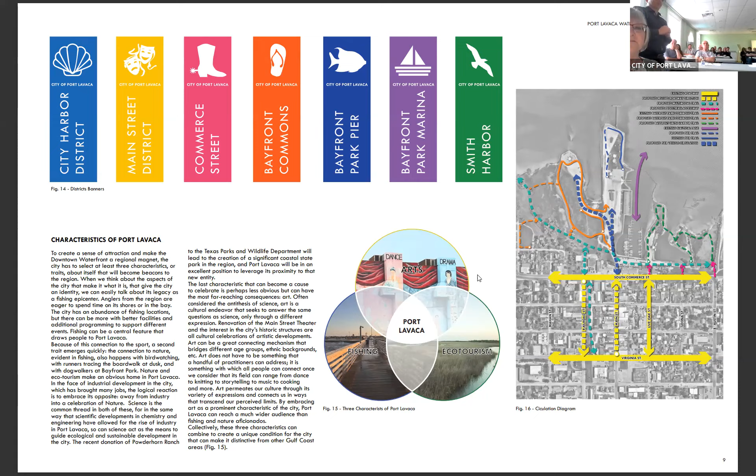Fay Bauer Sterling Park could use some help with landscape adjustments to improve its appearance. And because it's immediately adjacent to the railroad depot, our sense was that you could take a linear park all the way to Commerce Street from Virginia.

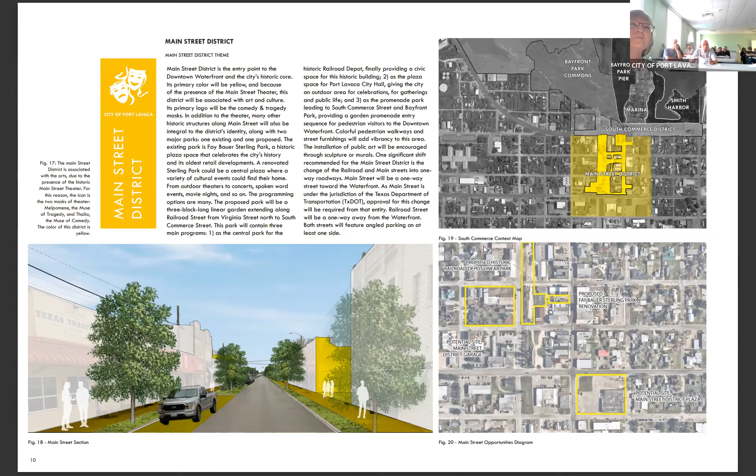It's about containing vehicles but giving them sufficient space to do things. That's much further down the line, but something we have to consider when we think about all of Main Street in its entirety. We have some imagery that gives a sense of what that would look like: a single lane traveling one direction with on-street parking to the side, vegetated planting with trees, giving more people spaces. So we're taking road away in favor of adding more people spaces.

This gives you a sense of what the overall image could look like. Again we have the pop-up or temporary market space. We have Main Street going one way to the northeast toward Bayfront Park, and we have the Railroad Depot Park, a linear park that celebrates the fact that the railroad was instrumental in the making of Port Lavaca. Then we have some ancillary spaces—potential art opportunities, potential little plazas, ways of engaging the built fabric in a meaningful way.

I want to say one thing about the colors, because I know you're looking at it and thinking, that's a lot of yellow—and it is. But it's not that we want to drop a giant bucket of yellow paint all over the place, rather that yellow is the identity or theming color of the district. We'd want that to show up not everywhere, but in key moments or locations where people see it—on lampposts, benches, or waste receptacles. There are ways of branding and theming that aren't ostentatious or obnoxious, but definitely give you a sense that yellow is the color for this particular district.

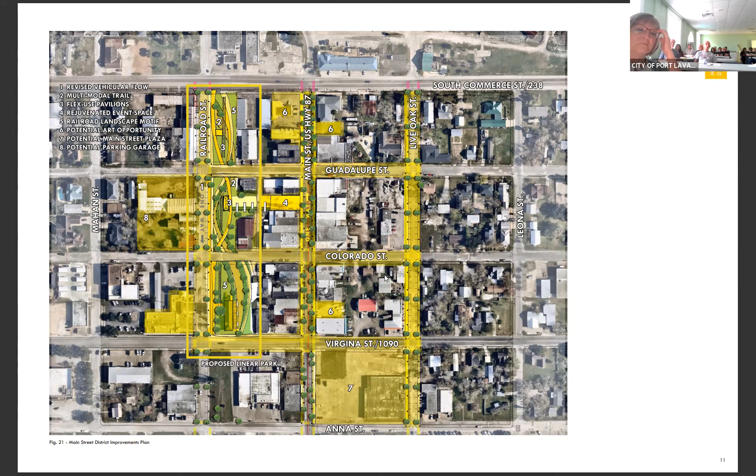Orange is for Bayfront Park, purple is for the marina, that kind of thing. You begin to associate a specific district with a specific color through little moments of color. For the purposes of the plans, they're much more exciting when there's a whole bunch of color on.

Along with every large scale plan we show, we're also going to show a series of next steps, dividing that into what kinds of things you can do in the short term, midterm, and long term. This is only in terms of design time, because the actual work itself is even longer. But you need a sense of what you can do very quickly, what takes more investment, and what takes a really serious amount of time—that helps you prioritize and think through what's reasonable.

In every one of these, for the short term we were looking for the easy things you can just drop in—maybe fabrication could take three months at most, depending on how supply is these days, though I think it's improving overall in the construction industry. Costs are beginning to come down too, which is also a positive sign.

But things like graphic identities or wayfinding—wayfinding being signage or banners—and then theming pedestrian crossings. What does that mean? One thing we felt could be really useful and inexpensive is having crosswalks painted in the particular district you're in. These are really easy to do; they're thermoplastic paints normally used on curbsides and parking lots. There are many examples of this being used decoratively, and it doesn't take a lot to replace—the maintenance is relatively inexpensive.

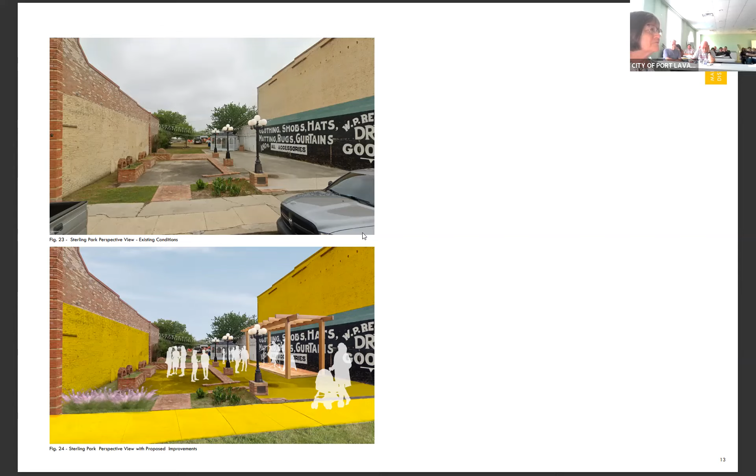Okay, so we're moving closer to Bayfront Park, and we come up to the Commerce District. Why is it a boot? And I did forget to mention—

For Main Street, the identity of Main Street is the artistic core of the project. The identity for Commerce Street would be more about look, because it's called Commerce Street, and because there's potential for restaurants and things like that, and because it's a transition between downtown and Bayfront Park, the idea was this could be a retail corridor. The identity for Commerce Street is that it's very much a place, or at least historically a place, of retail and commerce.

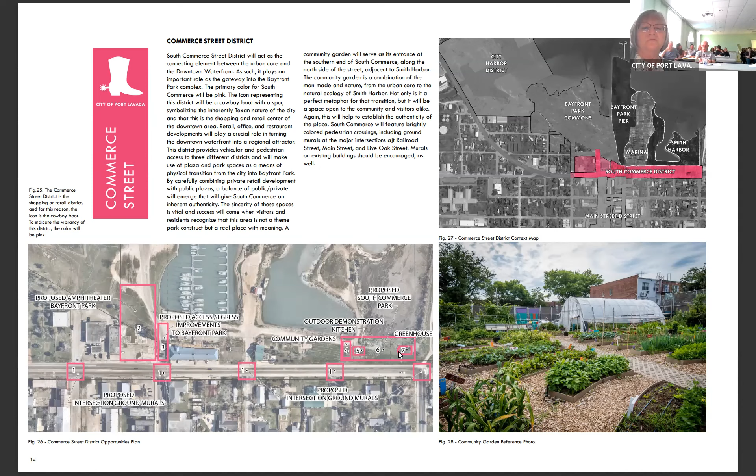You give people the opportunity to look at having a space of their own to grow the kinds of things that they want. It sometimes depends on the level of investment, not in terms of money, but in terms of time, how successful those types of places can be. But there are a lot of examples where it's very effective. Let's go to the next one.

Another element we started thinking about is how do you put Commerce Street on a road diet? How do you make sure you have sufficient parking space, something that improves the aesthetic appearance of Commerce Street itself? One easy way is with planted medians with palm trees in the center. Palms can take the salinity of the air in this region, so it just makes sense to do it that way.

We're also talking about a bicycle lane that may have some protection from the sun, so partial shade. That came as a result of one of the back-and-forth sessions, where people seemed to really want something to that effect. That's a longer-term problem.

Another thing we can look at here is the city plaza on the corner of Main and Commerce. Beyond that is an amphitheater that is really more part of Bayfront Park Commons. The intent is to keep a lot of the elements we have here and simply enhance them as possible.

For commercial development, we're saying this is a potential site. It doesn't mean the city is going to get involved in developing those restaurant or retail areas, but rather the opportunity for that is there.

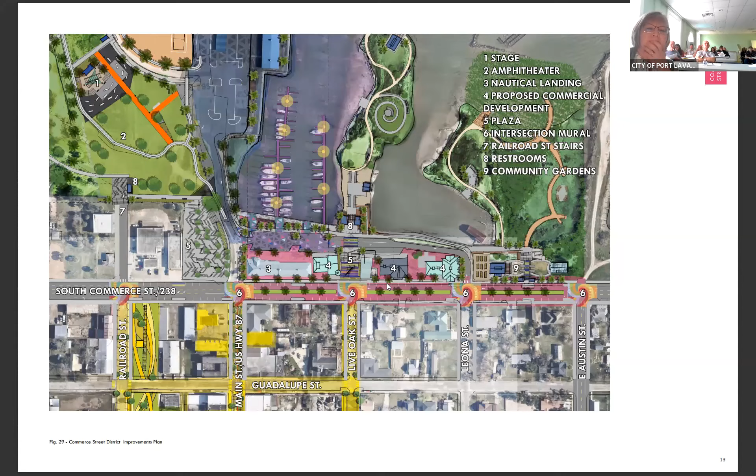The stage, the amphitheater, we'll talk about a little bit later. All right, go to the next one, because then we'll talk about what's short term.

So for the short term, again it's a similar process: it's about the banners, the wayfinding, the ground murals, the stuff that's really cheap and quick to deploy. Those are the things that begin to give a sense of identity. Once you have a sense of identity, you know, oh, this is this district, that's that district. Then you can begin to look at the longer-term projects and make further investment. Because it's all really great to talk about these giant plans we have in mind, but if nothing happens, it's just frustrating for everybody involved. That's why it's important to have some short-term goals and some really quick visual examples.

Banners sound really silly, but they're really amazing at giving a sense of place, because all of us, we're in the yellow banner area and now we're in the pink banner area. It's also a way of advertising potential events, and they're very cost effective. For me, it was really easy to say, look, you can begin to give a sense of identity through things like ground murals and banners. If you just do those two things, it'll change the way people perceive the area quickly.

Bicycle and roadway improvements, things like medians on Commerce Street, will require a conversation with TxDOT. Who knows, it could work or it might not, but the idea is to enhance the appearance of Commerce Street, to make it feel special and different from the rest of 238.

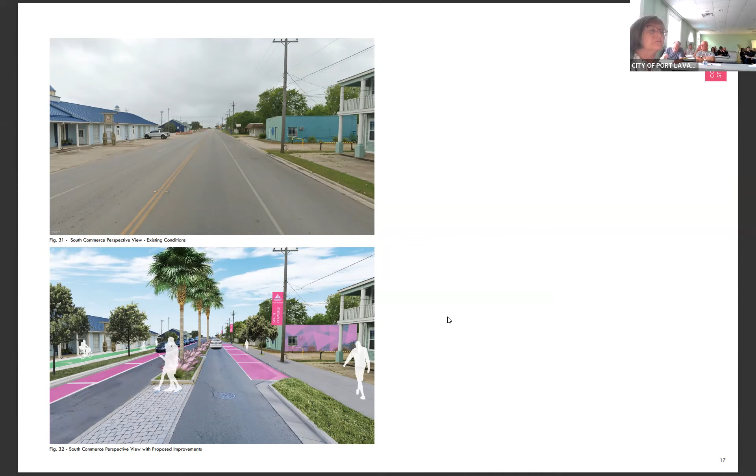I know I do. But when you begin to narrow it down a little bit, people take their time. Since we're talking about a lot of pedestrian activity on the site, it's important to slow that traffic down and make it safe.

How likely is it that TxDOT would approve something like that? I've begun the conversation, and they're waiting for this to be adopted to really start looking at it closely. It wasn't like a hard no.

They said, especially on Main Street with the one way, they would be looking to us to provide a study to show an alternate route, but we'd start with just some concepts we're coming up with. We'll take it step by step, but if at some point we pursue this, we would need to do a traffic study and show an alternate route instead of having Main Street both ways.

We haven't really talked about this on Commerce, but again, we're not changing traffic patterns there, so I don't anticipate that being an issue. Of course, we would be paying for it, but TxDOT in recent years has become very, very pedestrian friendly. They are cognizant of things like this and generally supportive of projects just like what we're looking at on Commerce Street.

What about trucks? Didn't we stop 18-wheelers from using Main Street a lot? Is there going to be a problem with that? You've got to do this downtown.

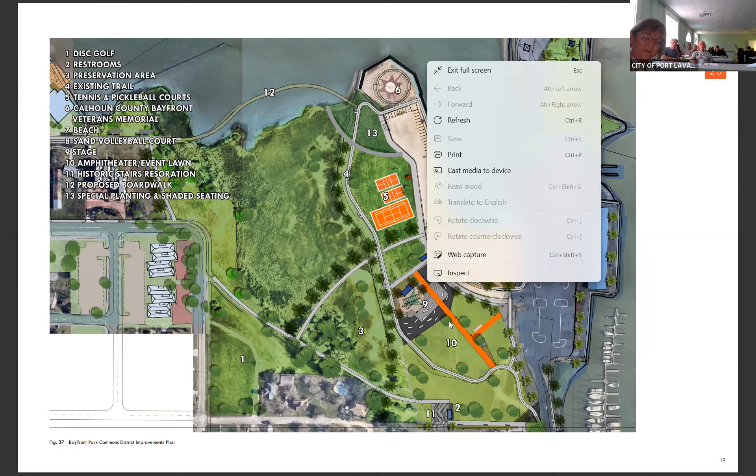Right now it's pointing south, southwest—kind of at an angle, sort of toward downtown but a little bit away. It doesn't face west, it's facing southwest. I had always thought it was going to face out towards the bay. We looked at that for events, and sun considerations for the audience—there's a lot of things like that to think about, plus the topography. Those are the kinds of things we decide in detail design, much further down the line, with specialists in that sort of design brought on board.

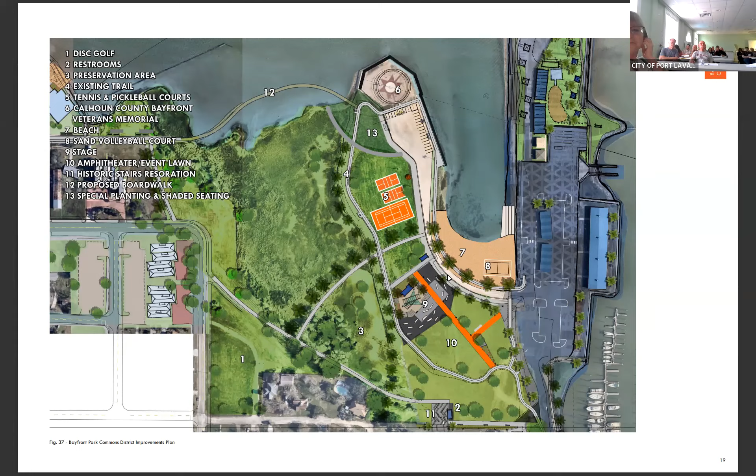Same thing with short-term, midterm, and long-term projects—your graphic identity, your banners, those are cheap and easy to do up front. The preservation area is fairly easy too; you just rope it off and make sure nobody goes into it. The disc golf course is a midterm project, and expanding the multimodal trails is midterm as well. Your longer-term projects are the beach itself and the amphitheater—those are the big long-term projects.

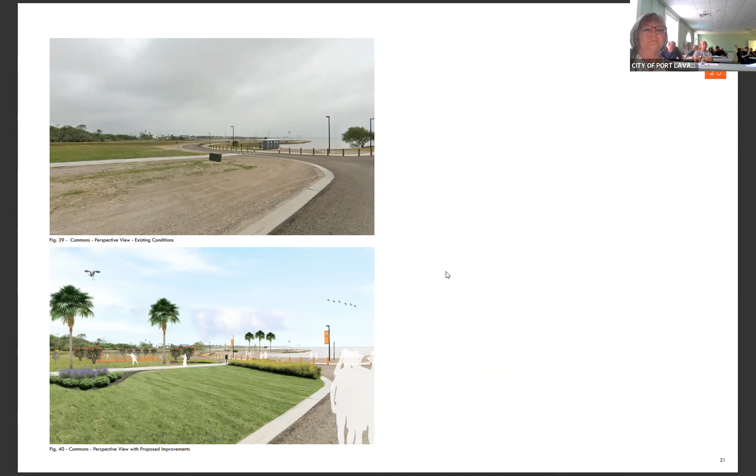So here's a vision of what that would begin to look like. You don't have to do an awful lot to enhance a place—the bones of it are already there. You're simply trying to enhance it in some way, and sometimes that's as easy as some good hardy plants that begin to add structure and frame the way the place is perceived.

Bayfront Park Pier, obviously the fish is the icon for this district. This is the district that, this one and the marina, are the ones that need the least amount of intervention, because the elements are already there, because people love it already as is.

So there isn't an awful lot that we need to do, but there are a couple of things we could look at to enhance the people spaces already there. In particular, the picnic shelters toward the end of the pier, and the playground. That playground gets used. It's fine. Could it be better? Sure. Is that a priority? Not necessarily. If it's working, it's okay. If we want to improve it, that's more of a future project.

But the direction from the visioning committee and the city was very clear. At one point I was like, nah, get rid of the cars. And the visioning committee and the city said, no, let's try to keep it.

That vetoed that. But one thing we can talk about is a ground mural in the main area itself, because that begins to add a sense of arrival, a sense that you're somewhere different and special, not just a concrete field. It begins to add a little bit of depth, a little bit of complexity. It makes it a little bit richer. That's what we're trying to do, give a sense that this is a special place.

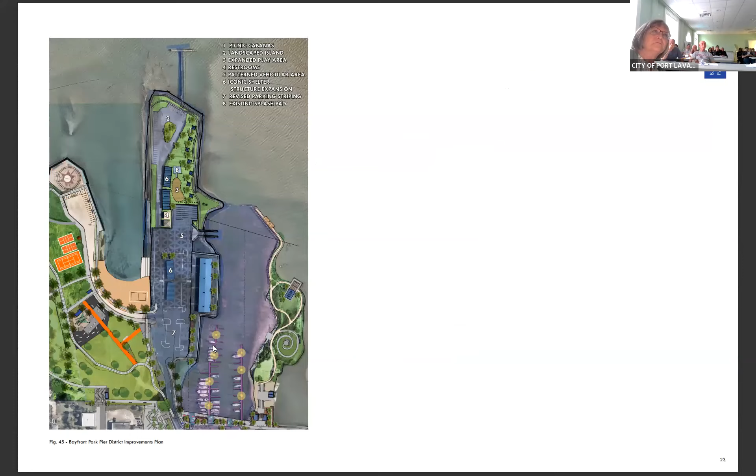One thing we did think about, go to the next one, is this example of what that ground mural could begin to look like. Just something graphic on the ground. It's really cheap and easy.

But one thing that's not cheap and easy are these vertical structures that could begin to define the space. You could hang some lights, and it begins to look really good at night. The idea is to activate the space at different times of the day. At noon in summer, people are going to want shade, but at night it's nice and warm. So try to make it as pleasant as you can. Have some food trucks, some seating out there, not permanent, but folding chairs and things like that. Something inexpensive that could create a sense of specialness.

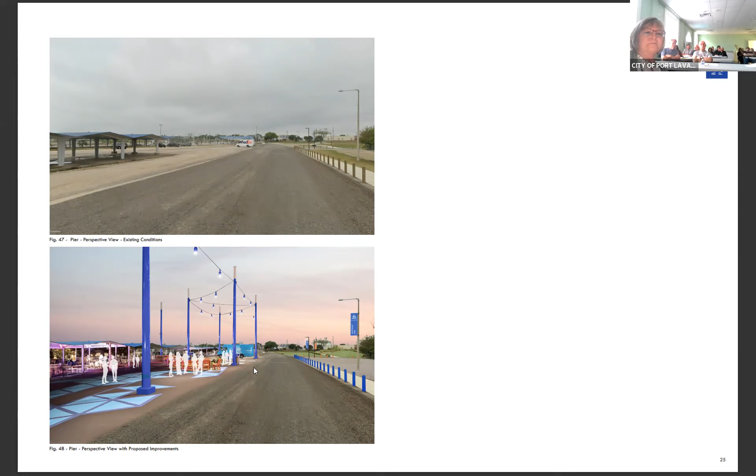There was a project in Boston that did this. It was just supposed to be a parking lot, and the owners said, why can't we try something a little different? They put some paint on the ground, gave it some organization, did some vertical elements, and it became a hugely popular space for young people. So that's the idea, to find a way to make it very inexpensive to have some night activities there.

For the marina, my sense is that it's working as is. Perhaps there could be some minor adjustments, but more than anything else, the marina suffers from a poor front porch, so to speak. If you enhance that, the easiest way is with landscape, creating a sense of gardens out there, and all of a sudden the perception of the marina begins to change.

To some extent, the conversation has been, look, Port Lavaca is not a yacht club, and we're never going to be a yacht club, and that's totally fine. But I still think the marina as an element, as a kind of iconographic element, is really good, because it talks about the different uses of the water. So it's not something we should shun, but instead celebrate, and you can do it fairly inexpensively with a slightly better organization to the way people move through it. That's the idea.

Let's go to the plan. So that's what number one is about. We're still going to have the vehicles. We hear it loud and clear that we want vehicles to be able to go through here. The way in which the vehicles do that is a subject of debate and something we've been talking about quite a bit. But suffice it to say that we're going to have a one-way in and out. Basically, let cars enter through one way and exit another.

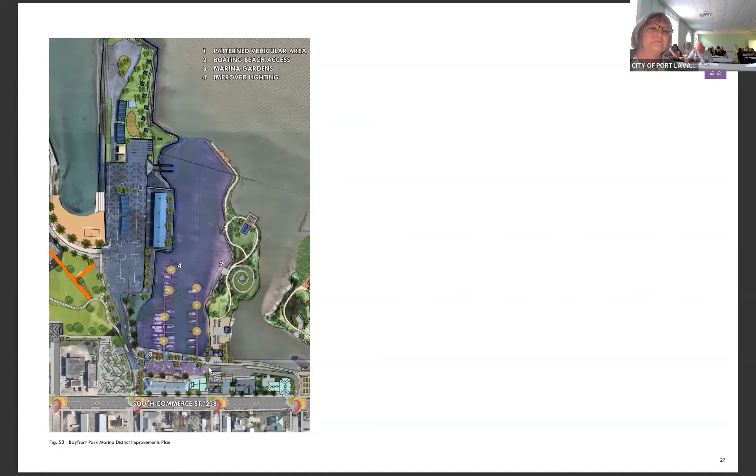So there's still some detail work that has to happen through here, but overall what we're saying is control and contain the vehicular traffic flow, provide some landscape framework for the marina itself, and potentially improve lighting at the marina. Again, that's a longer term project. You can see the list of improvements is minimal. The graphic identity and wayfinding, the banners, that sort of stuff, that's your easy stuff. Your aesthetic enhancements, gardens and things like that, could take a little bit longer.

Okay, now we move to Smith Harbor. Smith Harbor, the icon is a gull. Our sense is that this is passive recreation, that's the identity of this space, but that doesn't mean nothing happens there. Rather, it's not ball playing, you're not going to have people running through here, although I'm sure some people might. But we do want to focus on bird watching, on pedagogical elements like outdoor classrooms, things like that.

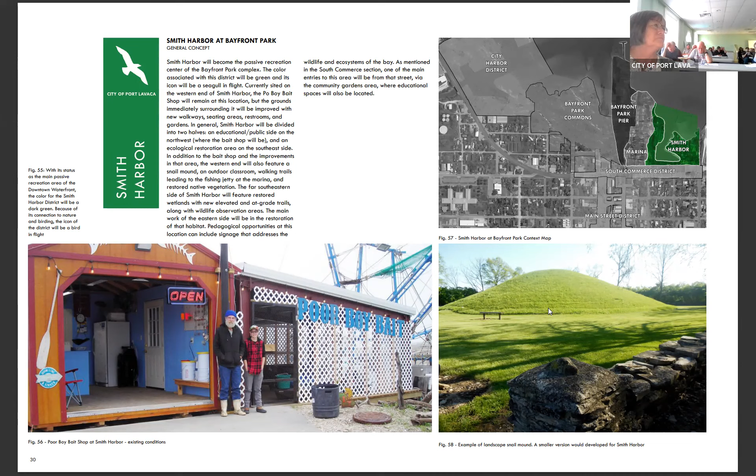Let's go to the plan, it's easier to see. So this is kind of the idea: use what the elements are already there. I know some of the spoils are not going to remain, they're going to be used elsewhere. But if there were to be spoils, you could have something like a viewing mound that gives you a little bit of elevation change and provides a landscape element in landscape history called a snail mound. You can make a very small snail mound.

It's almost like a labyrinth. If anybody has seen labyrinths associated with cathedrals and things like that, it's a meditative kind of path that you take through. That's the idea for the snail mound, this walk that takes you up to a viewing point. But we would also have things like outdoor classrooms, lookouts in number 5. Number 10 could be an outpost with a little bit more structure, and the perspective will show you what it's going to look like. There's no specific vision for what that structure could look like, but the point is to have some kind of elevated structure you can go up onto and do bird watching, or even just get views back to downtown or of Bayfront Park itself.

We have an expanded boardwalk network coming out, taking you to different points. Wetland restoration taking us out to the former jetties, the collapsed piers and things like that, becoming habitat for all kinds of water life. We still have Poor Boy's. Oh yeah, and absolutely, one of the grounding elements is the Poor Boy bait shop, and we want to enhance the area immediately around it so that it's not just a tack-on at the end, but rather a signature moment of Smith Harbor itself.

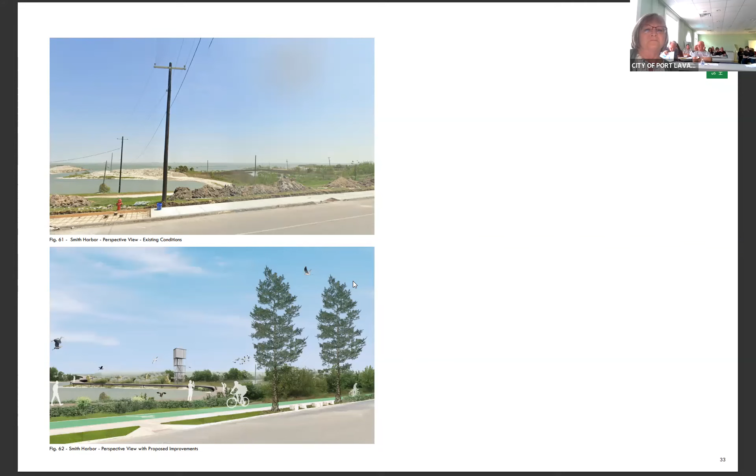Okay, our last district is City Harbor itself. One of the things we heard quite a lot is we need to be able to have spaces of nighttime entertainment, and we need to better take advantage of the commercial aspect of the harbor itself.

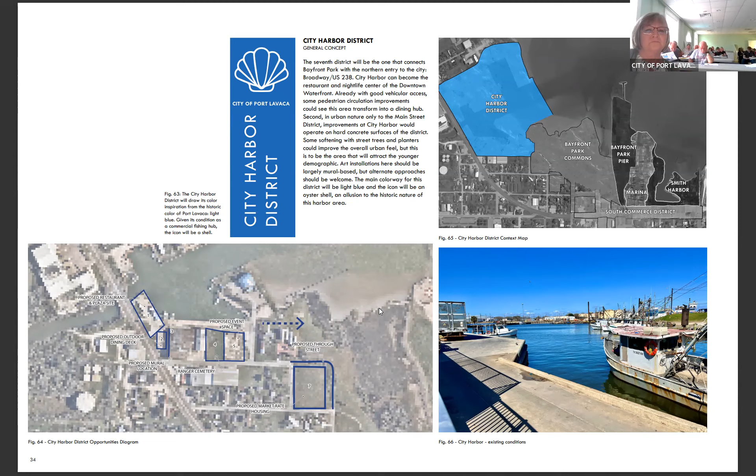Obviously we didn't want to touch Smith Harbor that way—we didn't want to turn it into this active nighttime thing. Similarly, the marina and the pier already have their programs in place. When I say program, I mean the types of things that can happen in a space—that's what we call program. So the program for the marina and the pier are already there, we don't need to mess with that. And to some extent the commons is the active core, so it didn't belong there either. We needed another space to think about what that begins to look like, and that's what the City Harbor District ultimately came to be.

So again, it's about taking advantage of the urban fabric that's already there—not about adding new things necessarily, at least in terms of retail or restaurants, but using the buildings that are there as a kind of background or backdrop and adding on to it.

One of the things we talked about a lot is a restaurant that could take advantage of the proximity to the bay. You could take your boat and drive right up to the restaurant, and have your restaurant experience right there on the water. That was something that was talked about a lot.

To some extent, your city is not in the business of opening a restaurant. So what we could do is provide the framework for that to happen, but we can't make the horse drink. We can lead them there, and that's about it.

Again, it's about creating a sense of arrival, a sense of specialness. That's what number one is. So you have an area where you can introduce the big traffic, have a drop off, have a valet type situation. You can have outdoor patio decks, a potential beer garden next to the historic cemetery. I don't know how that's going to work, but maybe it could work.

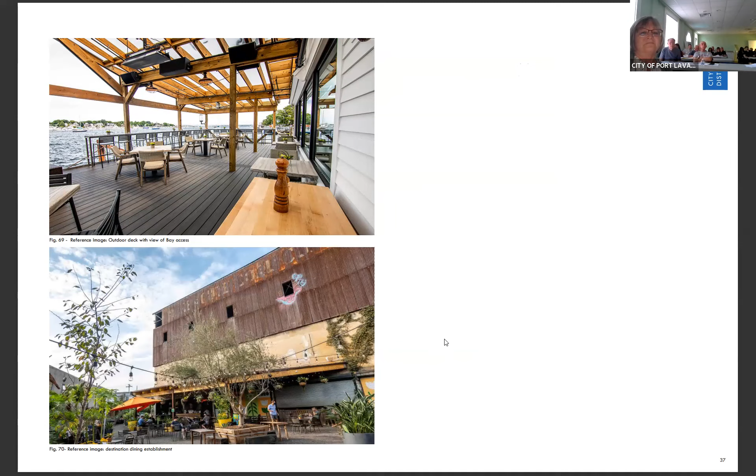Anyway, these are some examples of what that reuse of an industrial area might begin to look like, what that outdoor deck with bay access begins to look like. That's the feel we're trying to achieve with this district.

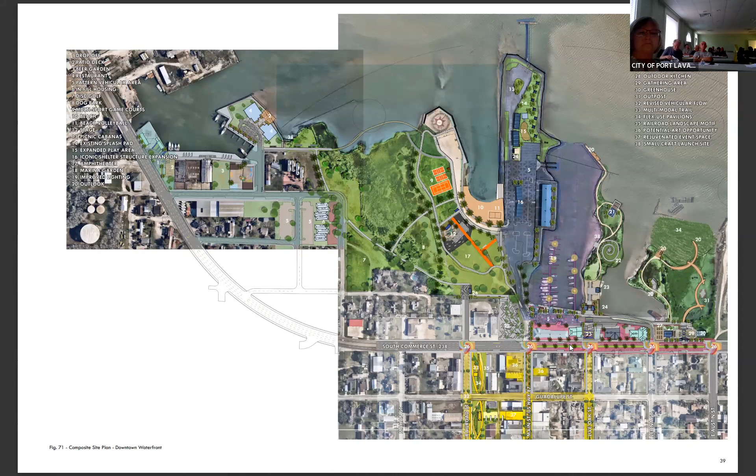Okay, and that takes us to the overall. This is a lot of stuff—it's a big site, a lot of different things happening on it. Again, it's by breaking it down into these discrete units that we begin to make sense of it. Otherwise it's just a little bit too much.

But one thing I do want to talk about in general, and this is my secret hope for Lavaca, is that there's an opportunity for expanded housing, because it just seems to me like this is great.

This is, if we can pull this off, wow, geniuses. But you need to have the people, and in order to have the people, you have to have the housing. How do you get to that? To some extent, you have to do both things at the same time. It's not like one thing can come before the other. You sort of have to build both things up at the same time. Seems to me. Any other thoughts?

I am out of gas. Yeah.

Does anybody from the visioning committee want to say anything in particular? Ernesto's done a good job of summarizing what we discussed. I want everybody to know there was a lot of dialogue that went on at all our meetings, back and forth, a whole lot.

Yeah, I like the idea of color, because when I was on an exchange program in Europe, there were certain places where downtown was colored - you mentioned that was cheap. A certain area would be designated yellow, blue, whatever. I think the fact that we have an awesome place here, color as a starting point - if we can approve this, then the starting point would be color. And just do that, because I think that's going to make an impression on people, because the only thing you've done is paint some signs or paint some poles or whatever.

So you were talking about the deck out there off the harbor, the lower deck - the lower dock is a working dock, correct, they have pickup trucks on it, boats, nets, all kinds of things. We don't want the public running around down there, they're on the upper deck. However, I would say that kind of intensity is not a detractor - people want to see that. Yeah, it's a working dock, right.

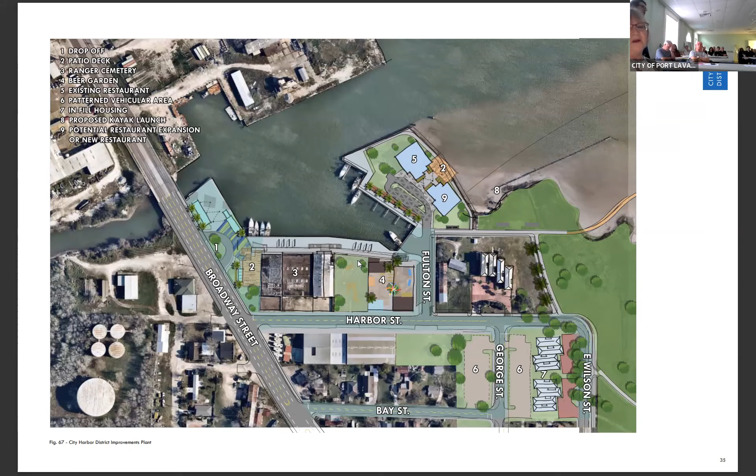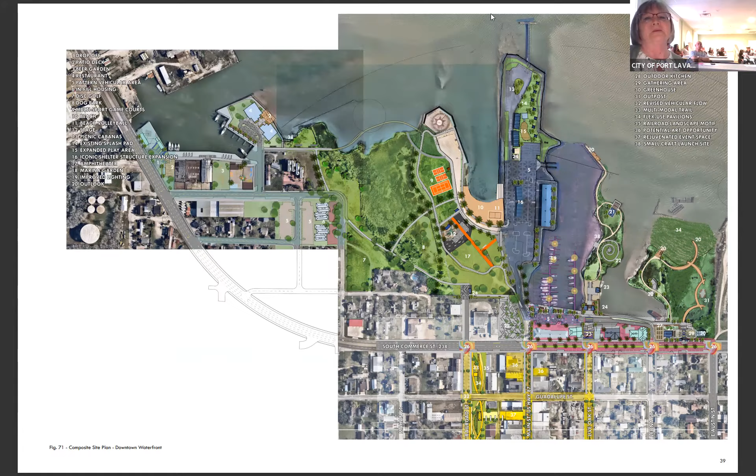Yeah, if anybody has any questions for me, please - not here for those items. One question: there's no action on this thing now that we've had this discussion? No, it's a workshop, workshop only. So when is the action item? We will take it to council for official adoption, probably at the next meeting.